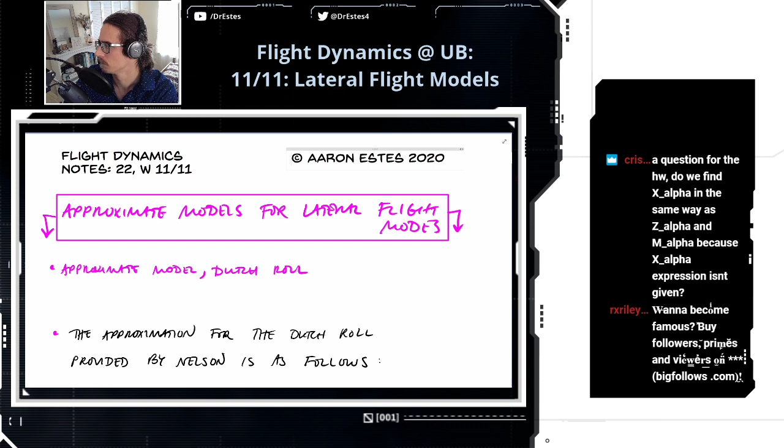Let me pull this up really quick. Hold on, let me ban this. Good. Okay, so the question was, how do we find X alpha in the same way as Z alpha and M alpha? Because the X alpha expression isn't given.

Hold on a second. What about X alpha right here? Did you see this? Do you mean the X alpha expression is given?

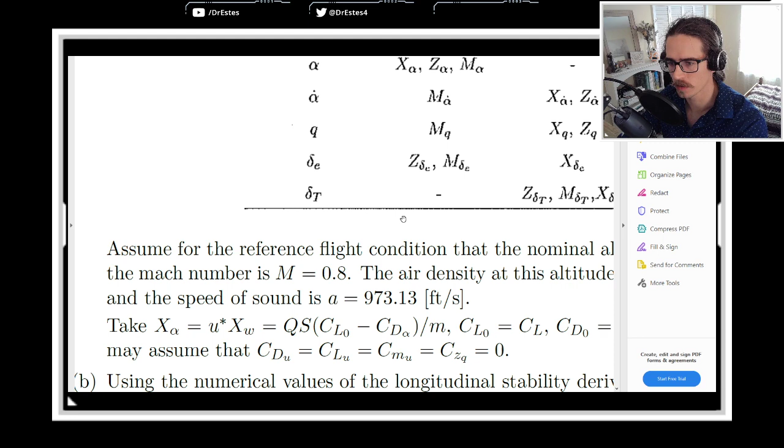Oh wait, I missed that part. Sorry, okay, that's fine. Wait, are you saying that X alpha isn't in there, because up here I mentioned that expressions for these stability derivatives that you need can be found in table 4.2 in Nelson.

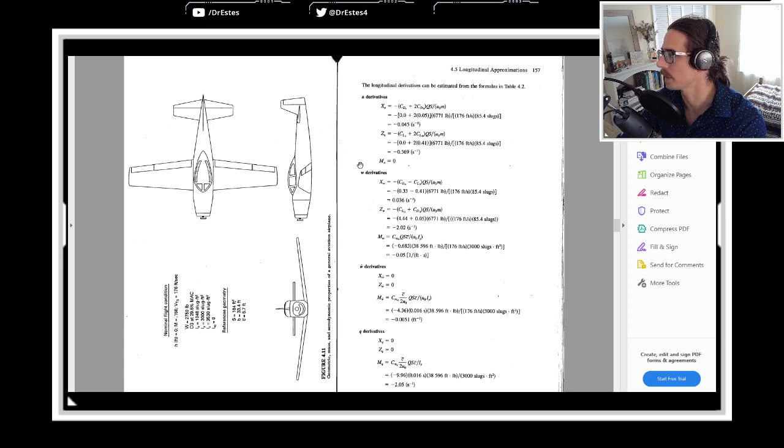So like, actually I have Nelson open. Oh, it's not in the textbook table. I see, okay, I see what you're saying. So X alpha, it's missing. So where the heck do I get it?

Yeah, you just use this. Do you guys have other homework questions while we're on it?

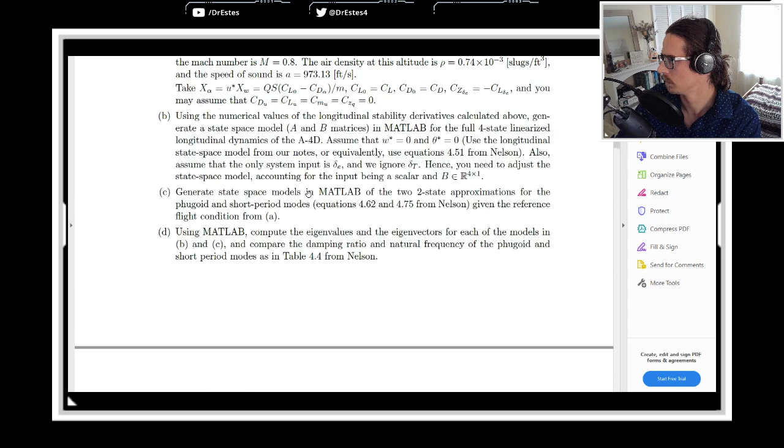Yeah, this one's comparing the full longitudinal flight dynamics model to some approximate models.

So today we're going to do approximate models for lateral flight dynamics.

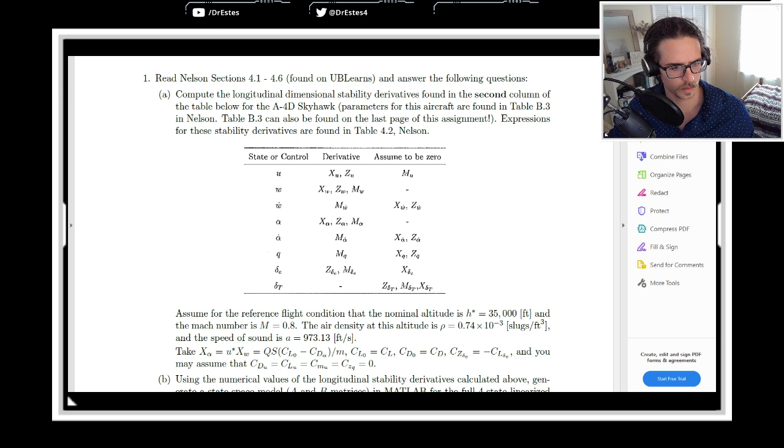But anyways, fundamentally, any aircraft motion, you could say that that motion is a superposition of its modes.

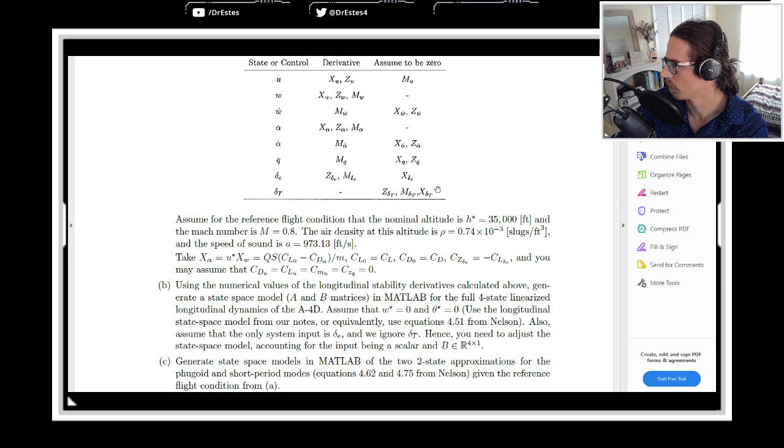Another question: for question 2, is the aerodynamic moment delta M because it has a pitch perturbation, or is it all of them combined? Sam Barry asks the same thing.

What you should do here is go to these equations in the textbook, 3.48 and 3.49. We have perturbations in aerodynamic forces and moments. Let me pull up chapter 3. Here are these equations, the aerodynamic moments L, M, N.

What is this question asking? I think it just means solve for the whole vector. It says UB-MAE student... right, I mean if, like...

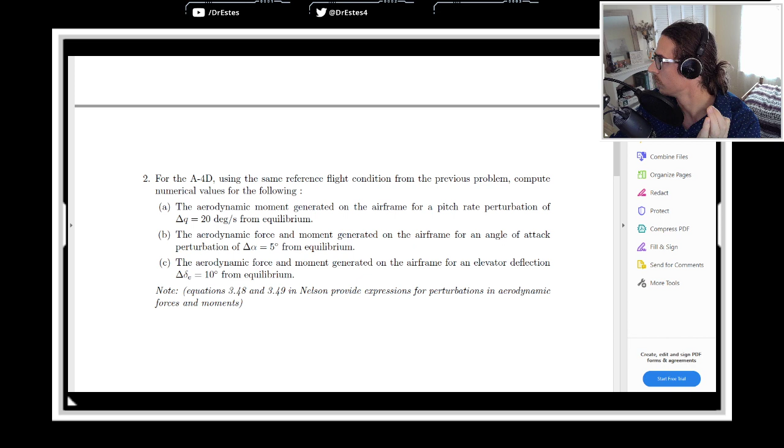So delta Q, where am I going... that doesn't show up in delta L. It shows up in delta M, but it doesn't show up anywhere else, right? So the only aerodynamic moment affected by a pitch rate perturbation, that's what Q is. Only delta M is affected.

So if more than one of these moments or forces happens to be affected, include that as well. And UB-MAE student makes a good point: the most thorough answer is to provide the whole vector, where some of the elements might be zero if that particular perturbation doesn't affect one or the other.

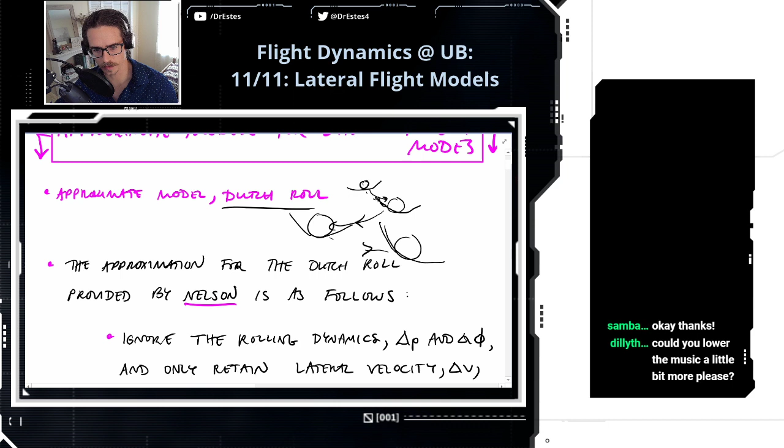Oh yeah, let me lower that music, Dilly. Let me know if it's distracting at all. Okay, you're very welcome.

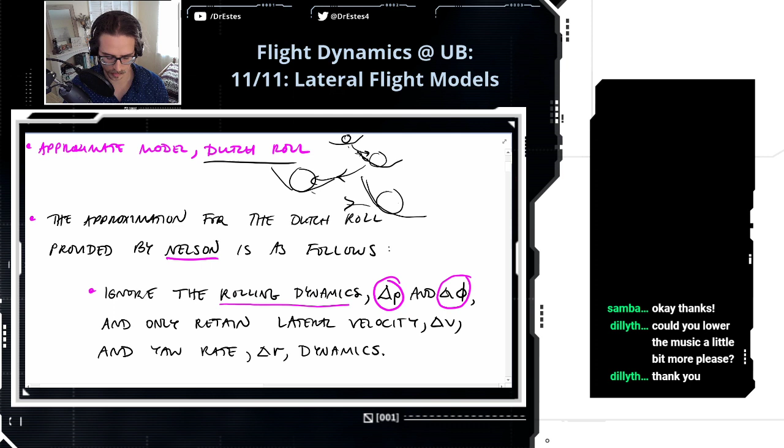So this is how Nelson does this simplification. First, he's like, okay, I know that this rolls a little bit as it goes back and forth, but we're going to ignore the roll. So we're going to ignore delta P, which is the angular velocity that pertains mostly to roll, and we're going to ignore changes in the bank angle itself. So we're only going to keep the lateral velocity and the yaw rate dynamics in our original model.

So here's our original model, and we're going to employ this assumption right here. So we're going to throw out this roll rate equation, we're going to throw out this equation as well. Let's see.

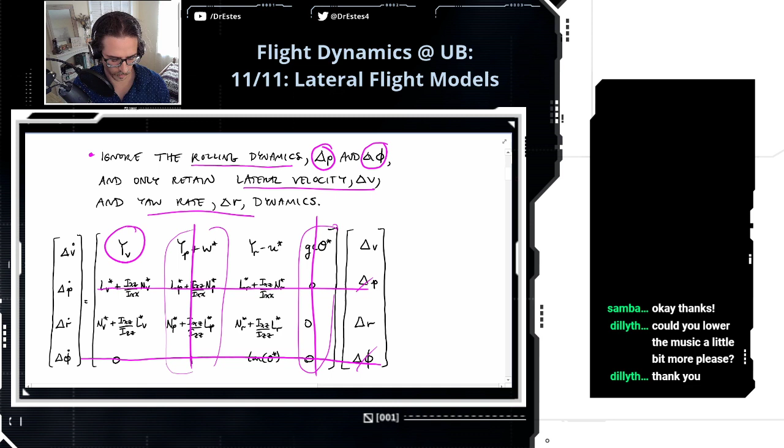Because these second and fourth columns are going to be multiplying these variables, in this case we're actually going to eliminate these as well. So it only leaves these entries of our original model. So we're ignoring the rolling dynamics, we're just keeping the lateral velocity and the yaw rate.

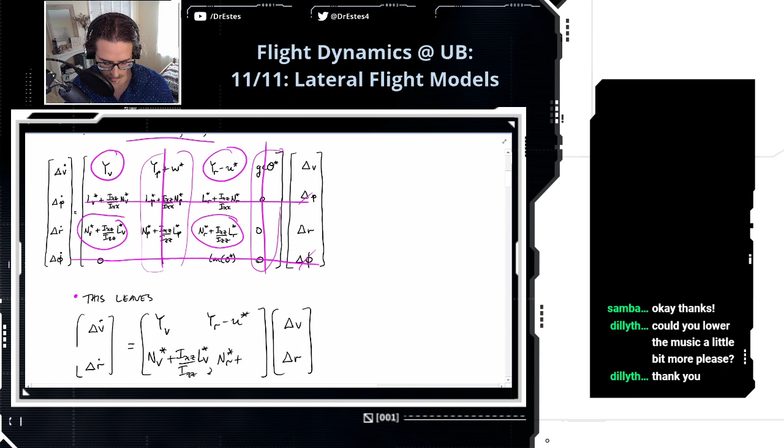So this is going to leave, let's just take those four remaining elements and throw them in the second order. So we're going to have y sub v, y sub r minus u star, nv star plus ixz over izz lv star. I'm running out of room here, but okay, nr star plus ixz over izz lr star.

And if you're, I doubt any of you remember what these star variables are, like these nv, nr. I don't remember myself, so I just wrote them down here. Basically this nv star, it's these inertia terms multiplying nv. And just to quickly remind you what each of these means, nv is the derivative of n with respect to the lateral velocity, so n is the yaw moment. So this is the derivative of the yaw moment with respect to lateral velocity. And I believe it's times 1 over the...

Oh shoot, I'm not going to remember which inertia term it is. I think it's like IYY, maybe. Okay, but don't quote me on this one. It's like 1 over some inertia term times this partial derivative. Whenever you're looking at any of these stability derivatives, they have some either a mass or an inertia term, so I just wanted to remind you that those things are there. I'll put a question mark there, it's some inertia term.

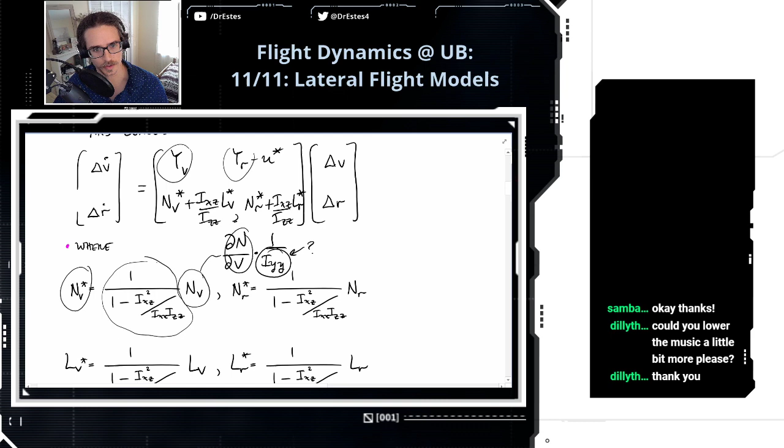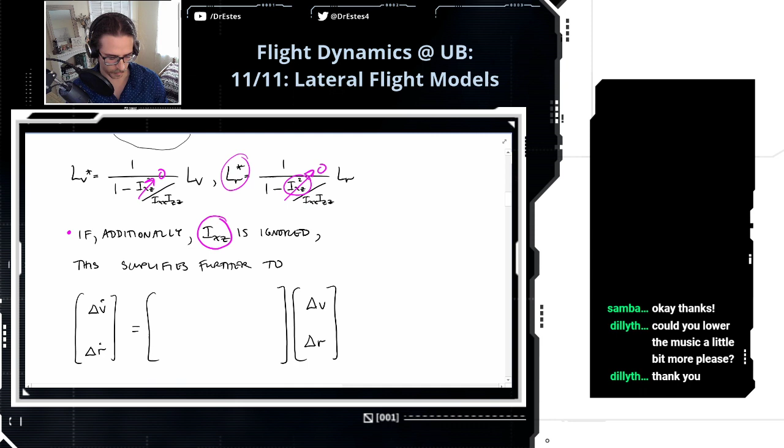So we cut out two degrees of freedom, basically, we made this a second order model. Now, additionally, if we ignore this inertia term, it's going to simplify this a little bit more, because all of these star variables, they're pretty much associated with this IXZ term. So if I ignore IXZ and it goes to zero in all of these, instead of having this NV star in my system, this is going to reduce to just having NV, or whatever it is in either case. So let's make this assumption, and it's going to make our equation a little simpler yet again. Remember, each time you're cutting something out, you're losing some of the fidelity of your model. It's just a question of does it still capture the basics of the real system?

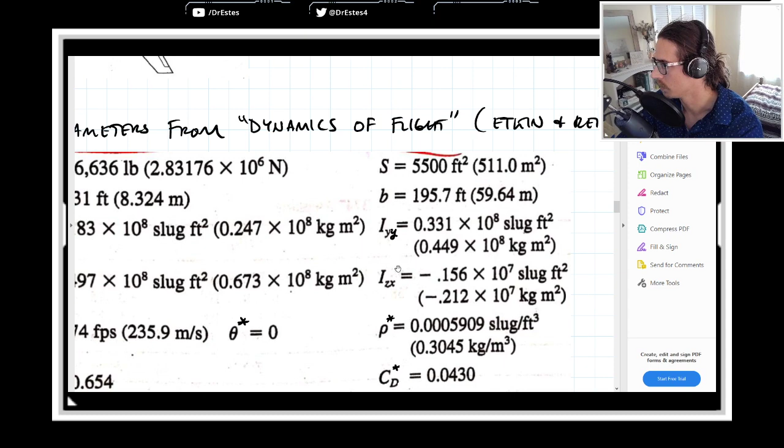Let me pull up something really quick. So if we're talking about cutting out IZX, that inertia, let's zoom in here. You can see that this is minus 0.156 times 10 to the 7th slug times feet squared. So this is definitely, it's a huge number, it's not negligible. However, if you compare it to these other inertia terms like IYY, it's times 10 to the 8th, same with IXX and IZZ. So it's an order of magnitude smaller. That's why he's kind of like, can I ignore it? And that's what they do.

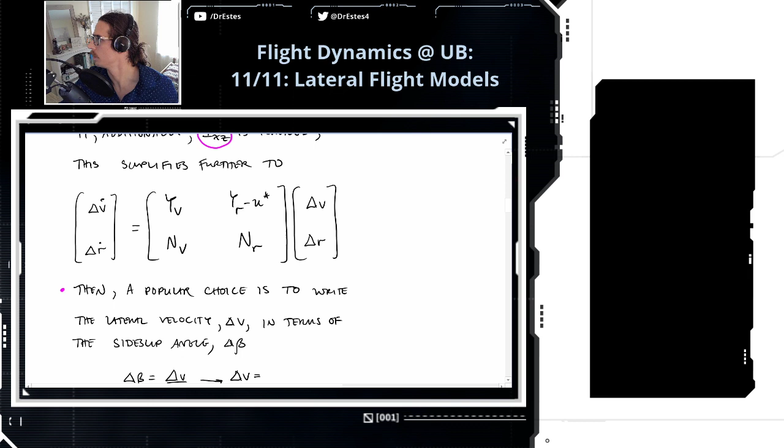Okay, so we've simplified this a little bit. Now, a popular choice, instead of writing this equation in terms of the lateral velocity, which is delta V, we can write this in terms of the side slip angle. All of these variables are perturbation variables with the delta out in front, meaning they're small. So for small side slip and small lateral velocities, we have this relationship. So I could say delta V is just U star, which is my longitudinal speed, times a perturbation in my side slip angle.

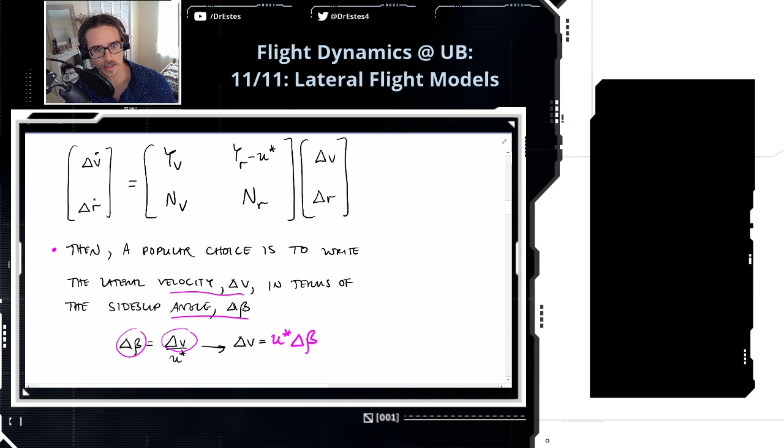So if we take our first equation up here, this delta V equation, now I want to write it in terms of delta beta. So if you multiply out this first row, you're going to get delta V dot is YV times delta V, yada yada yada, you just multiply out that matrix. So if we take this and we use this beta assumption, this is going to become U star delta beta dot, that's just the time derivative, is going to be YV times U star delta beta. So I'm just substituting in this expression.

Delta R. Now, what they also like to do is, now that we're writing things in terms of beta, this stability derivative YV, the derivative of the lateral force with respect to side velocity, we can write that in terms of beta as well. So this is the definition of that stability derivative, 1 over m times this partial. But if we write V in terms of side slip, assuming they're small, then we can do this. So I have 1 over U star times 1 over m dy d beta. And this is y beta. So I could say YV, that stability derivative, is the same as 1 over U star times Y beta.

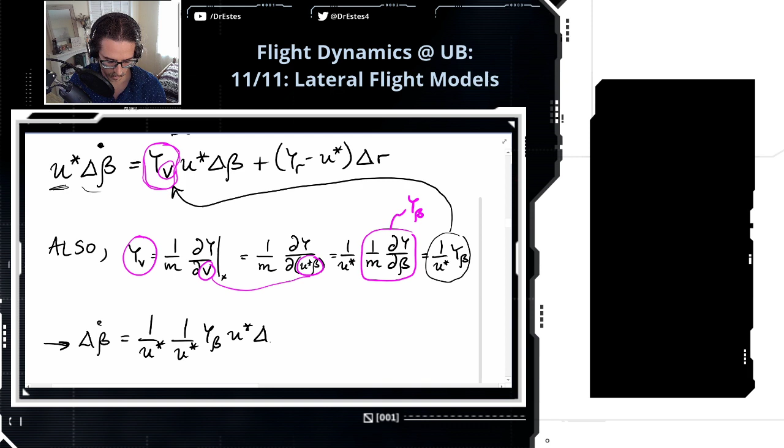So let's take this delta beta equation. We'll divide both sides by U star. I'm going to have 1 over U star times YV, which is 1 over U star Y beta times U star delta beta. Let's cancel those two. And then I'll have plus, so I have to divide this stuff by U. Let's do YR over U star minus 1 delta R.

Okay, so this will be our final simplified delta beta equation. We'll put it in a matrix in a second. But that's our first equation, and we had two equations here. We also have this one, this delta R dot equation.

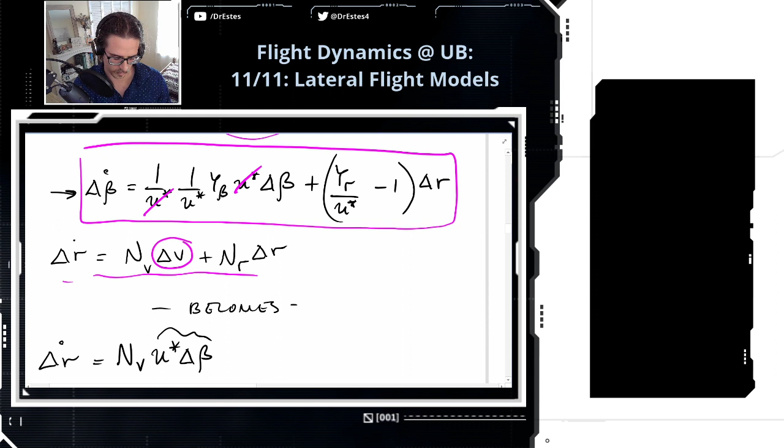We want to write this in terms of beta as well. So this delta V term, we're going to change that. So N V, U star delta beta, so that's delta V, plus in R delta R.

And we want to do the same thing that we did with YV, that we did with NV. We want this to be a partial with respect to beta now. You can go through the same line of reasoning, but it's going to get you to this place. Basically, N beta is, you just need that factor of U star. So then delta R dot is going to be, so these U stars are going to cancel here. So I'm going to have N beta delta beta plus N R delta R.

Okay, and we're finally at the end of this simplification of the Dutch roll. We went from a fourth order to a second order, and we're just going to put these two equations that we just got into this matrix form. So the delta beta equation: 1 over U star Y beta, and then 1 over U star YR minus 1, and then N beta, and then N R. So they have this in the Nelson textbook, and now we have the details of where the heck they got this.

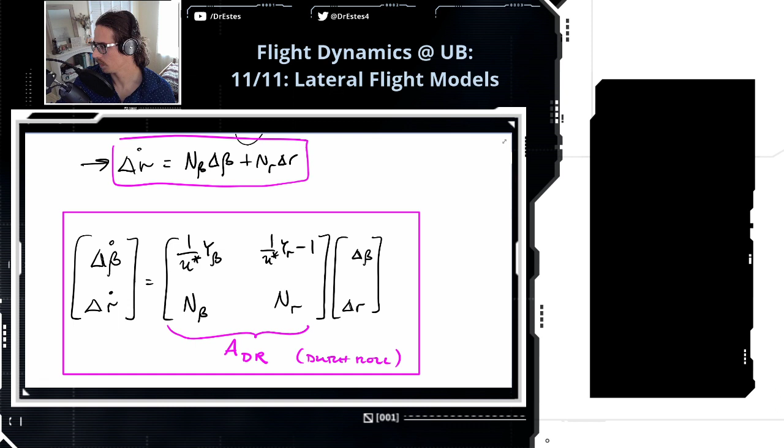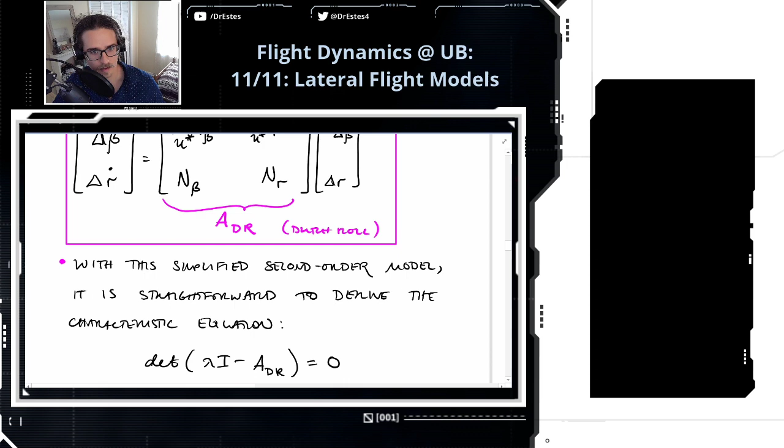Okay, so now that you have this simplified second order model, it's straightforward to get the characteristic equation. From the characteristic equation comes the roots, and the roots dictate your stability, your settling time, all of this stuff that you're going to want to control. So having this simplified model gives you the advantage of having an analytical expression for all of this stuff.

And you can do the root locus analysis. We spent a day doing root locus with the longitudinal simplified equations. So you could do the same kind of root locus kind of stuff with this.

So if you have a matrix equation, like a state space model, this is the characteristic equation: determinant of lambda times the identity matrix minus this A matrix that we derived. So if you do that math, we're taking the determinant of this matrix.

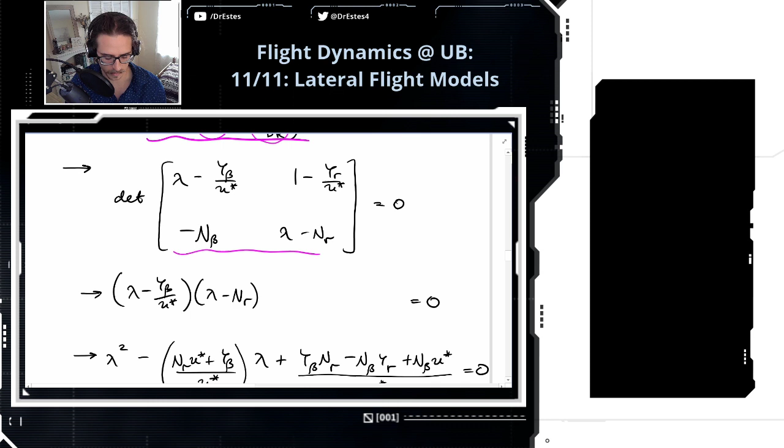Just to remind you of a determinant of a 2 by 2, you're going to have top left multiplied with bottom right minus... well, it'll be that. And then I just multiplied this stuff out. All stuff that you guys have done before.

You are experts. Like with this second order form, you know that this term is the natural frequency squared. You know that this coefficient of lambda is 2 times the damping ratio times the natural frequency. So you can get analytical expressions for the damping ratio, the natural frequency, the settling time, etc.

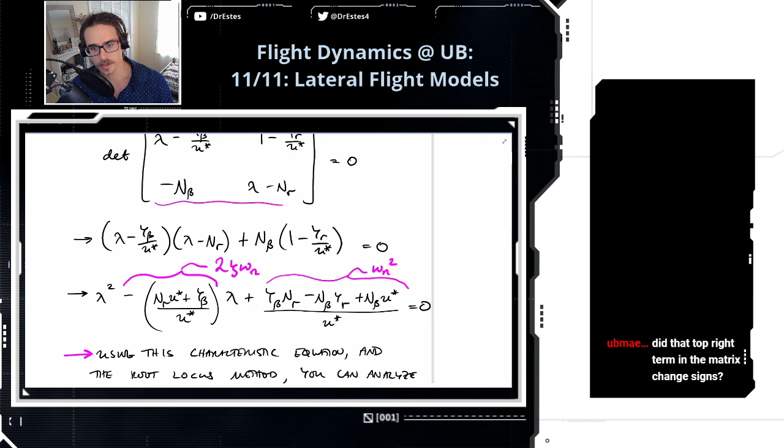Did that top right term in the matrix change signs? Yes, okay, yes, because we're subtracting it here. Good question. So everything should be, yeah, because this changed signs. This did. Yeah, good question, just because we subtracted that bad boy.

Okay, so basically what I'm saying is, okay, it's great. I get this analytical expression for the characteristic equation. I can say that I can analyze how a specific term affects the dynamics using root locus. Da da da da da.

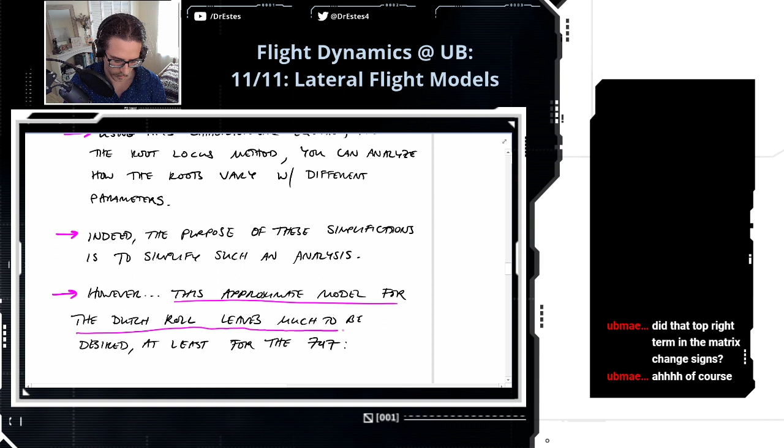Okay, but here's my beef. Here's my beef with this model. This approximate model for the Dutch roll leaves much to be desired. Well, at least if you're looking at the 747. And this is what I mean. Let's consider this flight condition.

This is what we've been looking at, flying straight at 774 feet per second. I forget what altitude we were looking at, but whenever we've been playing around with the 747, I've been using the same flight condition, so we can just go back to a prior set of notes to get more of the details.

But what I want to do, we have numbers for each of the elements in this matrix. So here's our simplified model, but I just plugged in the numbers for the 747. And if we grab the eigenvalues, there's two of them, and they're complex, which is good because this is an approximate model for the Dutch roll. The Dutch roll has complex conjugate roots, so at least we have that.

What I want to do is get the natural frequency, damping ratio, settling time, and compare that to the actual Dutch roll from the full model that wasn't simplified. And let me give you a couple cheat codes, as you guys mentioned before, some dynamic systems cheat codes.

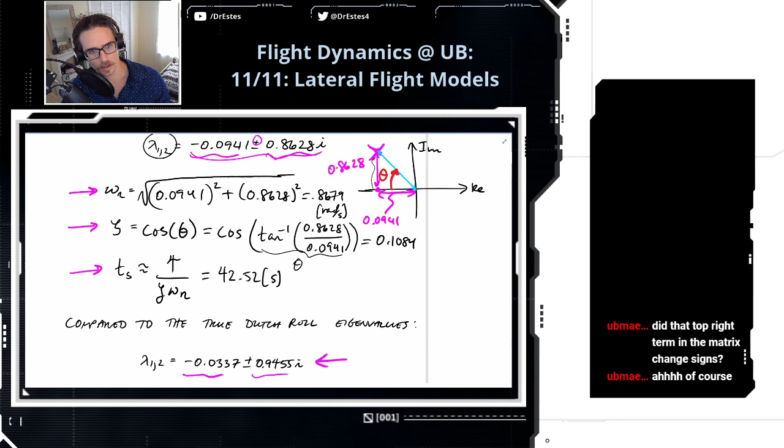Okay, that's what the approximate model says. If we go back to our full fourth order model, before we did any simplifications, I already got the eigenvalues associated with the Dutch roll, and they are these. They're complex. You can see already the real part is different. The imaginary part, not super different, you're looking at 0.86 versus 0.95. But the real part is significantly different.

Okay, let's just blast through this. If I use the same technique, this is what I got for the natural frequency, 0.946 radians per second. If we compare that, 0.8679 to 0.946, I think that's pretty reasonable.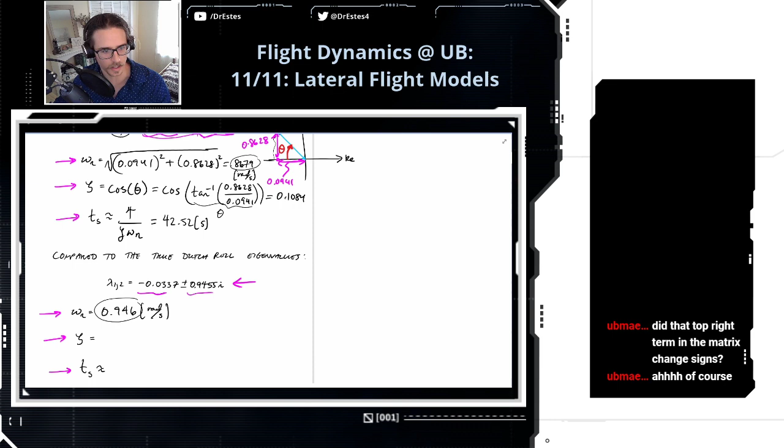What is that in hertz, cycles per second? So 0.8679... wait, how did I do that? This conversion always, I have to think carefully about it. I think I just divided by 2 pi, right? That gives 0.1 cycles per second. And then the real one is 0.15 cycles per second. Okay, that's pretty close, that's actually reasonable.

Damping ratio, what about that? I think this one's off.

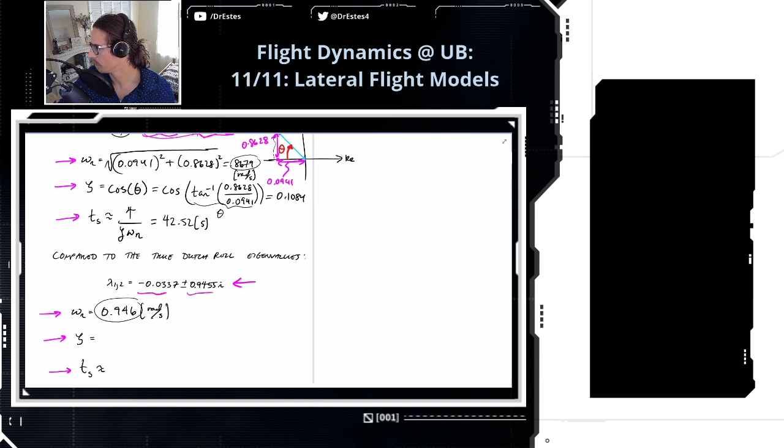0.0356 compared to 0.1084. So with the approximate model, we way over-predicted the damping ratio. You'll see this in the settling time, because this has a smaller damping ratio, in real life it takes much longer to settle. 118.76 seconds, so 2 minutes, and this one takes 3/4 of a minute. So the settling time is significantly off.

So if you design a control system for the Boeing with the intention of maybe damping out this Dutch roll if it ever gets excited, you're going to be basing that control system on a model that isn't a super accurate representation of the Boeing 747. But something you should know is that any models we have for real life systems always have errors, because they are abstractions of the real thing.

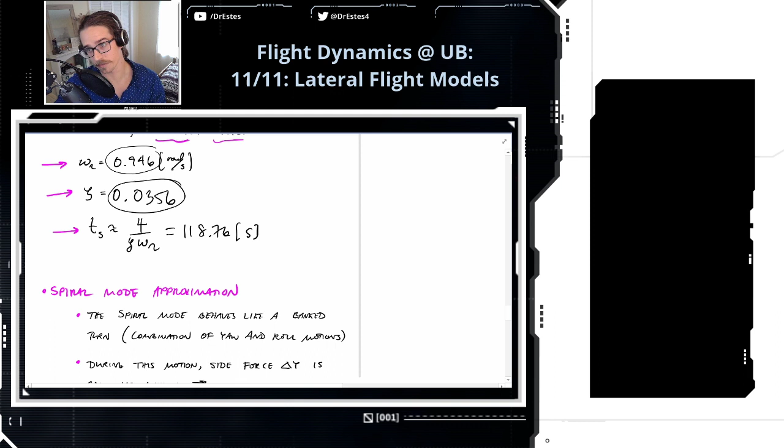Okay, let's move on because we have two other models to make. The Dutch roll was the most difficult. Spiral mode is a little bit more straightforward, and the roll mode, you're just going to laugh to yourself at the simplifications that we make. Okay, the spiral mode - what the heck is it?

If you just want to visualize the spiral mode in your head, it kind of behaves like a banked turn. So a combination of yaw and roll motion, but usually it's kind of like a fixed roll angle or maybe a very slowly changing roll angle. So it's like we have this maybe circular path that the aircraft is navigating, and it has its wings kind of tilted into the turn as it's going around.

Now, this is like the style of turn that a commercial aircraft is going to do. And the reason they bank during the turn is so that the side force is reduced, so that your drink doesn't spill into the aisle or onto your Nintendo Switch.

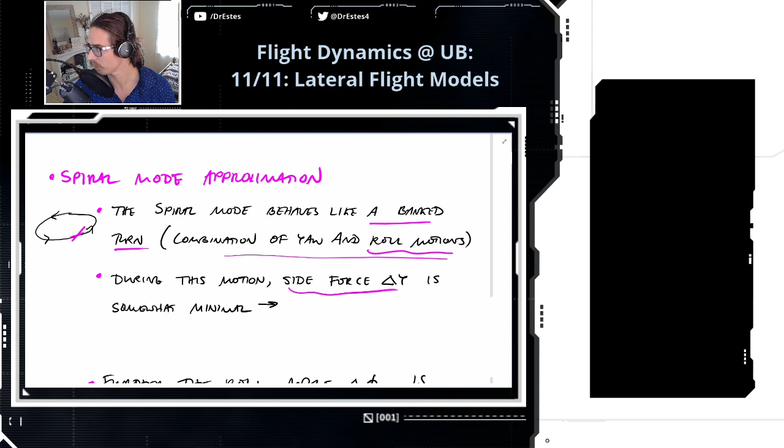So the first approximation that Nelson makes, considering that the side force is somewhat minimal because of the banked turn - the side force affects the lateral velocity equation - so the approximate model neglects the delta V dot equation. I'm going to have the 4x4 matrix below here, and we're going to cross out different stuff.

Okay, so further, the roll angle is assumed constant during this banked turn. Like I said, the real spiral mode, the roll angle slowly changes over time. If you have a stable spiral mode, your wings will level out and the roll angle will go to 0. If you have an unstable spiral mode, the roll angle increases.

You kind of go in this tornado motion towards the ground, and it's trouble, unless you correct for the motion. Okay, so we're assuming the roll angle is constant. Now, if the pitch angle is nominally also 0, meaning the nose of the aircraft is level with a flat earth, this implies that any change in my roll rate is 0. So delta P is your roll rate. Well, this also implies that the derivative of my roll rate is 0 - so like my roll acceleration.

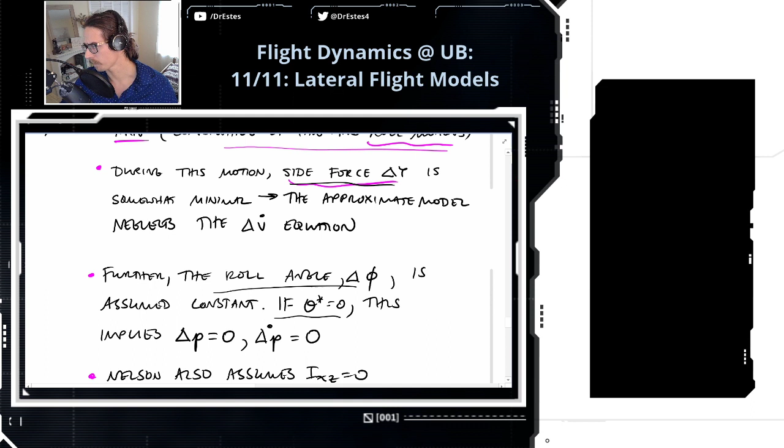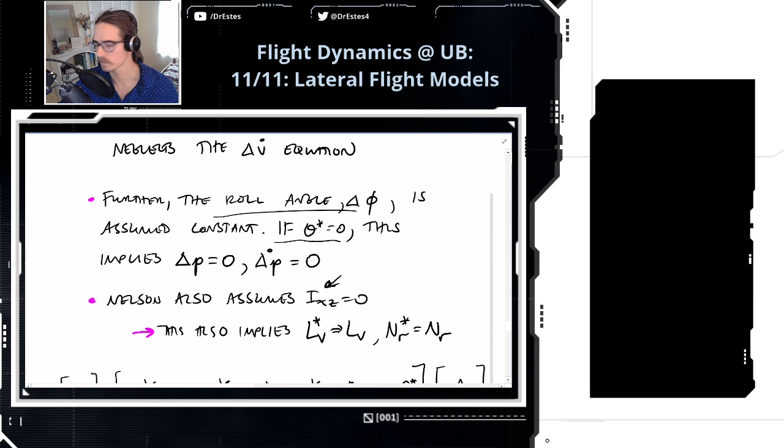Okay, here we go. We're going to take this fourth order model that we started with, and we're going to start eliminating things. So number one, this side force equation - we're just going to ignore it, we're going to throw it out. We're going to assume that the nominal pitch angle theta star is 0, so the tangent of that's going to be 0.

And that means that delta phi dot is equal to 1 times delta p. So this is saying that delta phi dot is equal to delta p. And we assumed that this is constant, so this is 0. If the roll angle isn't changing, then that's 0. But from here, this is equal to delta p, so delta p is 0.

What other assumptions do we have up here? Oh yeah, if this is 0 for all time, then delta p dot is 0. And these terms in this second column, these are the terms that when you do matrix multiplication, they're going to multiply with this 0. So this whole column is going to be multiplying with 0.

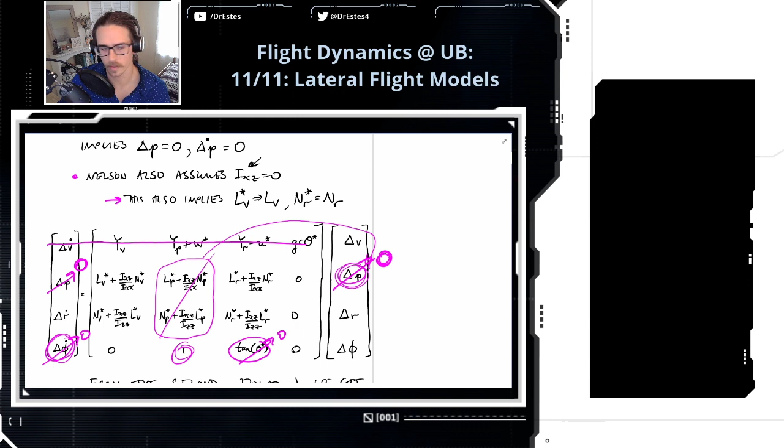All right, so let's keep working with this. From the second equation, this delta p dot equation, that's going to be equal to 0. And that's going to be equal to, oh right, we said IXZ is 0. So this is 0, this is 0, this is 0, this is 0, so those terms go away. And then all of these star terms just become the unstarred version. So this LR star, that's just LR, and that's just because we're assuming IXZ is 0.

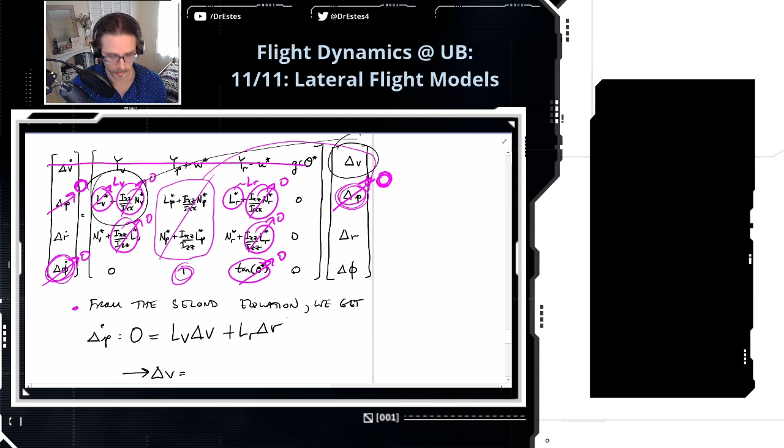So now if I look at that second equation, I'm going to have LV, and this multiplies with this delta V. LV delta V plus LR, which is going to multiply with delta R. So that equals 0. So you could solve for delta V from this, and it's going to be minus LR over LV delta R.

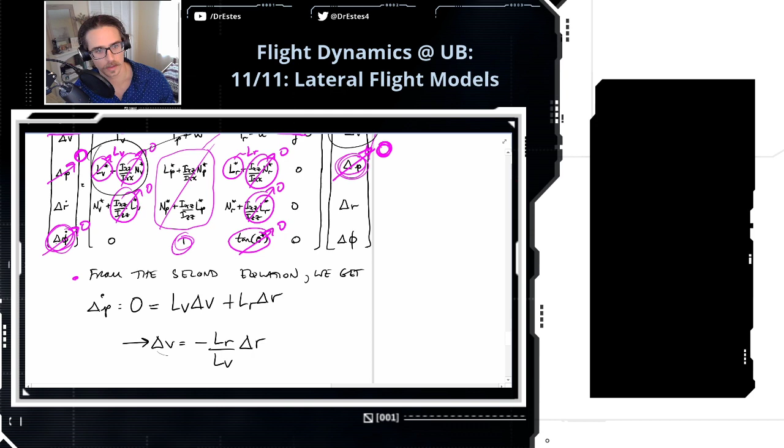Okay, next I want to look at the third equation, this third row right here. So delta R dot, that's going to be NV delta V plus NR delta R. And what I'm going to do is take this expression that we got and throw it in right there. So this is going to be minus NV LR over LV delta R plus NR delta R, that's just substituting it in. And then we can just write this in a little bit nicer way: NR LV minus NV LR over LV, all of this times delta R.

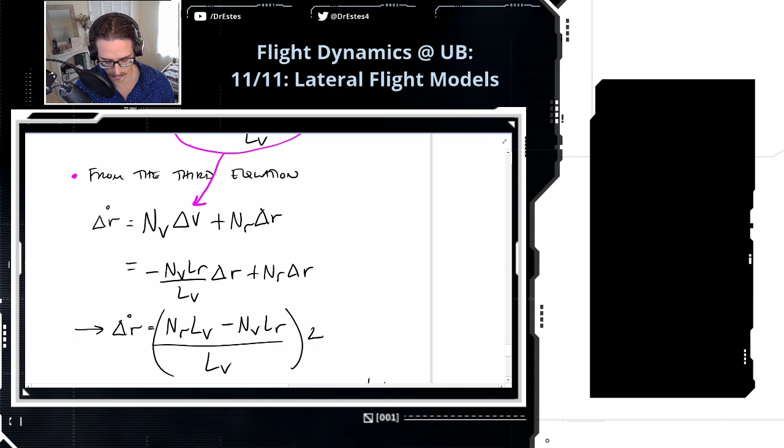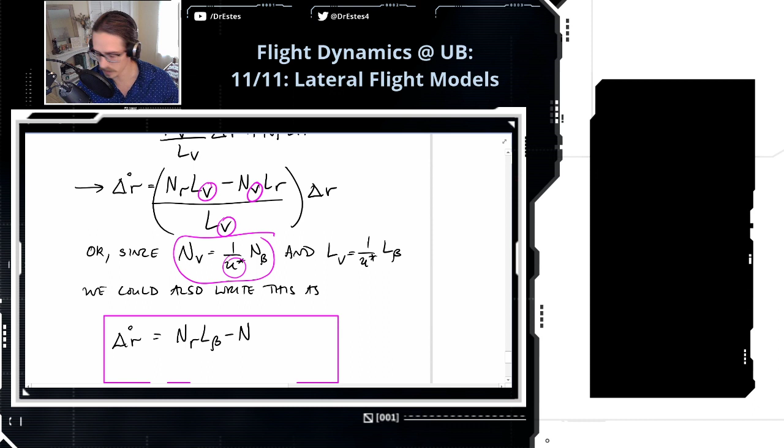Oh right, and then Nelson likes to, instead of using these V stability derivatives, replace them with beta stability derivatives, just like we did with the Dutch roll. So we have these relationships: NV would be 1 over your speed times N beta, blah blah blah blah blah. So if we substitute, it turns out that we have NR L beta minus N beta LR over L beta times delta R.

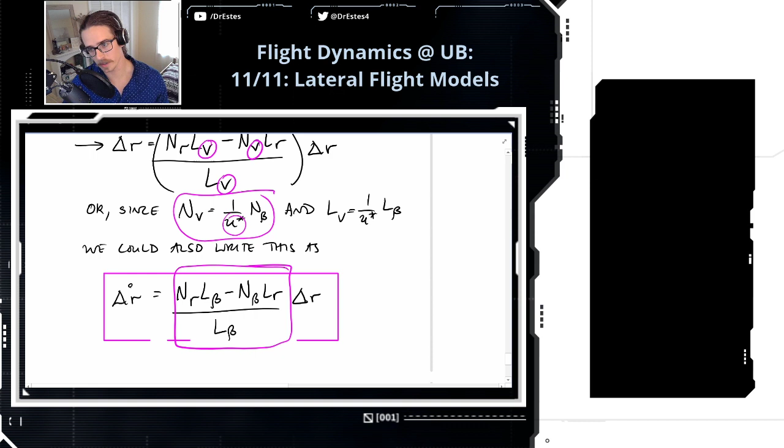Now this is just a first order model. The Dutch roll model was second order, so we had 2 roots, and they were complex conjugate roots. Well now we just have 1 root. Whenever you have 1 root by itself, it's going to be a real root — you can only have complex roots if there's a pair of them. So this can be either a positive real number or a negative real number. Hopefully it's negative, meaning it's stable. So this right here, this is going to be the eigenvalue for this model, or the root of the characteristic equation. And we'll call it lambda spiral. Just keep in mind, this is approximate.

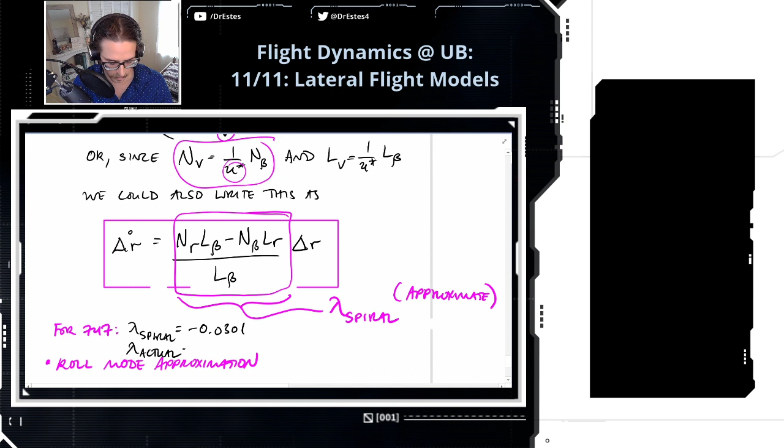Okay, for the 747, lambda spiral approximate is minus 0.0301. Lambda actual, the one we got from the 4th order model, is minus 0.0073.

Actually, you could talk about the speed of all of these roots. And when I'm talking about the speed of the root, I'm talking about the time constant or the settling time. The settling time or the time constant of a root is based on... wait, let's go back over here.

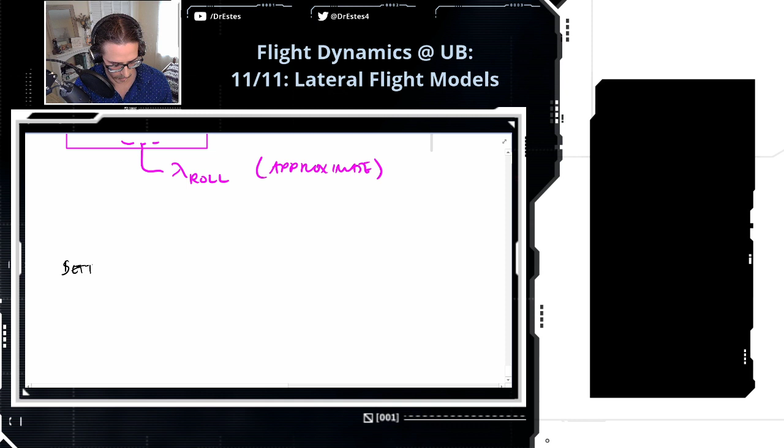Let's go down here. Okay. The settling time: the time it takes for the system to decay 98% towards a resting state.

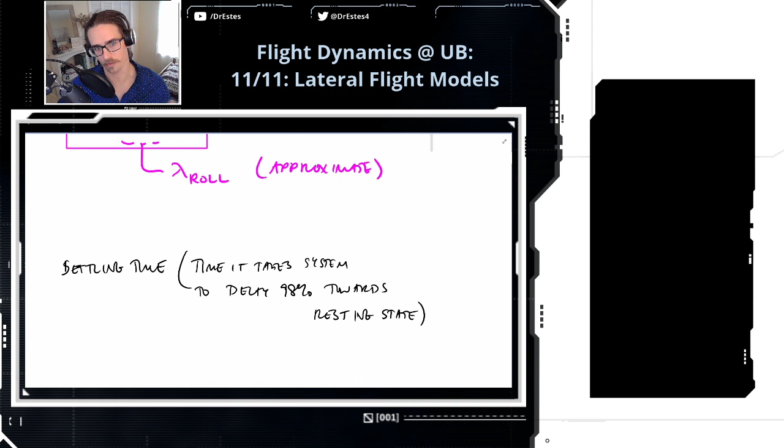So wherever you position a linear system, if it's stable, if you just let it go and do its thing, it'll decay towards a resting state, which is 0 for linear systems. So the settling time is the time it takes for it to get 98% towards that final resting state. For our purposes, it's basically like it has settled within that time.

Okay, so the settling time, this is the most general formula for it. I should put approximately, I think it's approximate: minus 4 over the real part of your root.

So let's take the 747 for example. It has 4 roots, and each has their own real part. The real part of lambda 1, which is the Dutch roll, the first one, is minus 0.0337. And that is equal to the real part of lambda 2, because they're complex conjugate, they're the same, so that's the Dutch roll. The real part of lambda 3,

which is going to be the roll mode, is this, which we haven't gotten to yet. We're looking at the real part of lambda 4, which is the spiral mode. And I said this is the slowest. Okay, so why do I say it's the slowest?

Let's get the settling time for each of these. So for the Dutch roll, it's minus 4... Is it just the real part because the Euler identity keeps the real part in the exponent, but the imaginary part goes to the sine and cosine? You are exactly correct. The real part dictates the speed of the exponential decay, and the larger the magnitude of the real part, the faster the decay is. And then a byproduct of the exponential decay is the settling time.

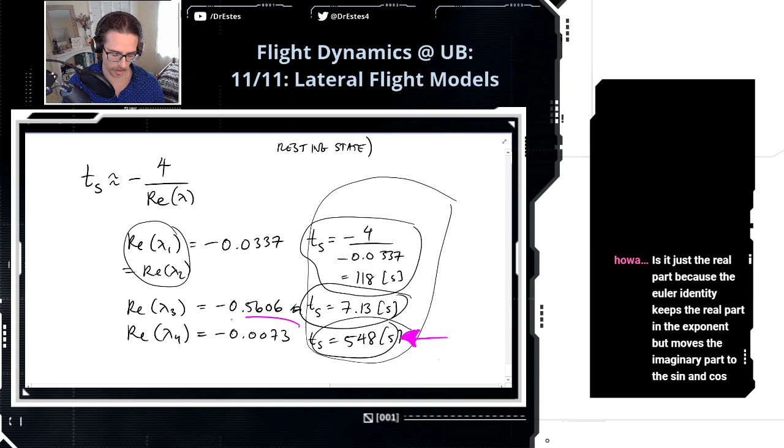Unless you stabilize it with a controller or the pilot themselves kind of corrects for it. But I hope that gives you a good idea of how you can determine which is the slowest root. It's going to be the root with the lowest, the smallest real part, smallest in magnitude, that is.

Wait, okay, so let's get the settling time from down here. This helps us. So the actual settling time is like 540 seconds of settling.

So out of the 4 roots, 2 will have the same real part, which is the Dutch roll, and you can tell the other 2 apart by the settling time. You're exactly right. If you're given 4 roots and they tell you, okay, this comes from a lateral flight dynamics model, you would be able to say, okay, right here I'm looking at the Dutch roll, those are the complex roots.

And then from the other 2, you're like, okay, which one's slower? Okay, the slowest, that's the spiral one. You're an expert. People will be like, how did you know that? And then you won't tell them, you'll keep it a secret, because you should never reveal your tricks as a magician.

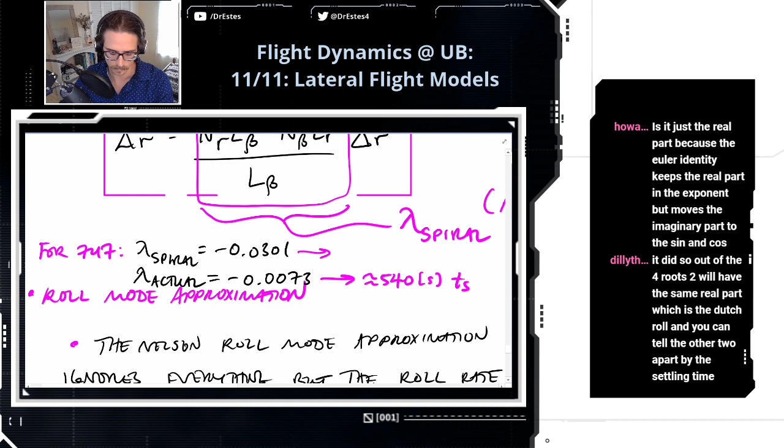Okay, so obviously now you know that this is going to predict a much faster settling time because between these 2 roots, I know that this is the slowest one. So, okay, let's calculate it: 4 divided by 0.0301, this predicts like 132 seconds.

So, at least for the 747, that's significantly off, right? That's a huge error. Maybe for a different aircraft, it wouldn't be so bad. But this is what Nelson prescribes.

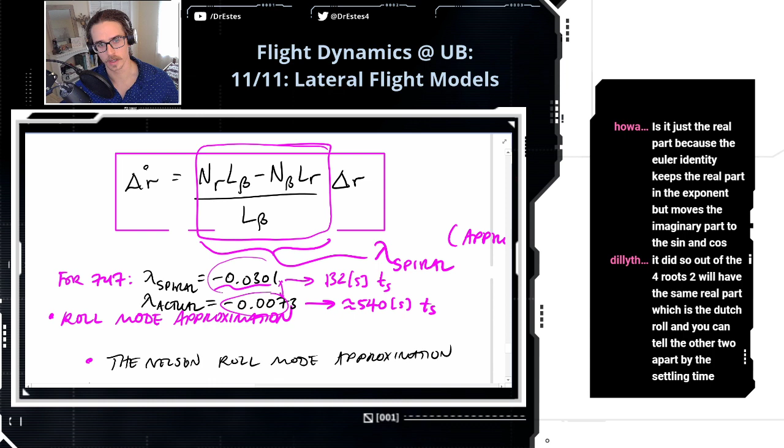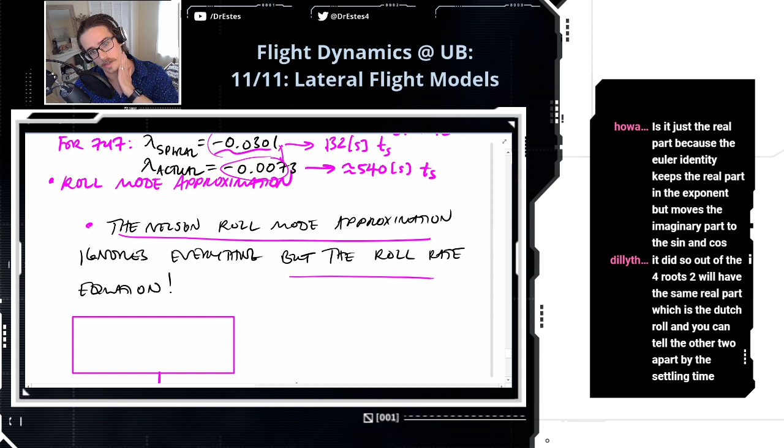Okay, we have one more mode to get an approximation for, and that's the roll mode. The Nelson roll mode approximation ignores everything but the roll rate equation, delta P. And within the roll rate equation, they only retain the terms delta P. So it becomes a very simple equation.

Delta P dot, the time derivative of my roll rate, is LP times delta P.

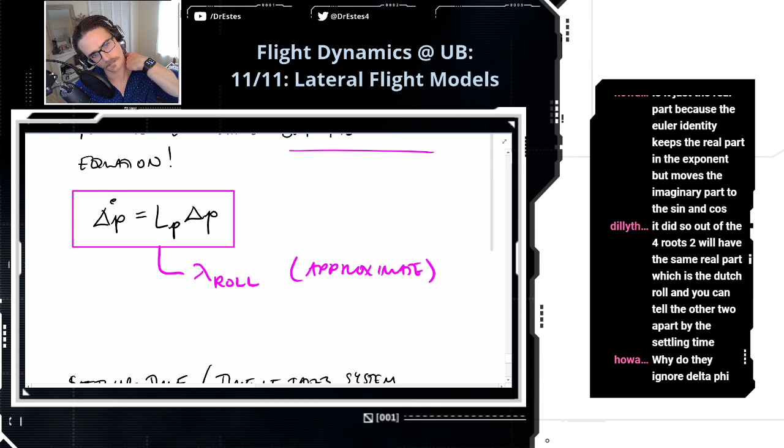Why did they ignore delta phi? That's a good question. Let's go up here. I know this one's kind of cluttered, but that's a really good question.

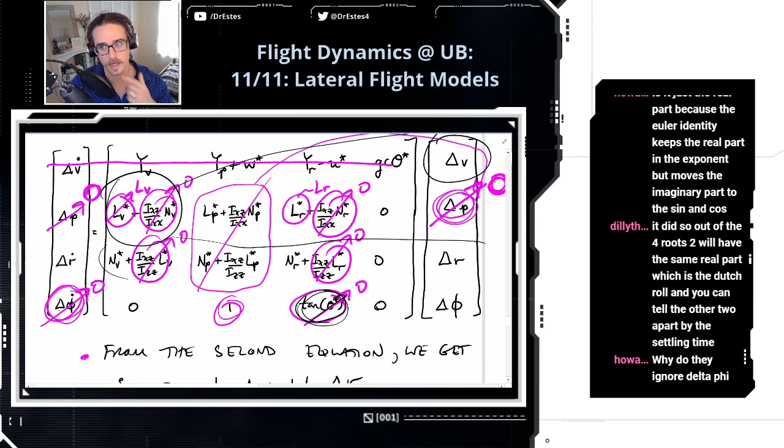Let's look at this delta phi equation. I'm assuming we're going to assume that this nominal pitch angle is 0. So the delta phi equation is going to be this: delta phi dot is going to be equal to delta P.

If we kept that, we would have this second order system, right? And what would it look like? It would be LP, 0, 1, 0.

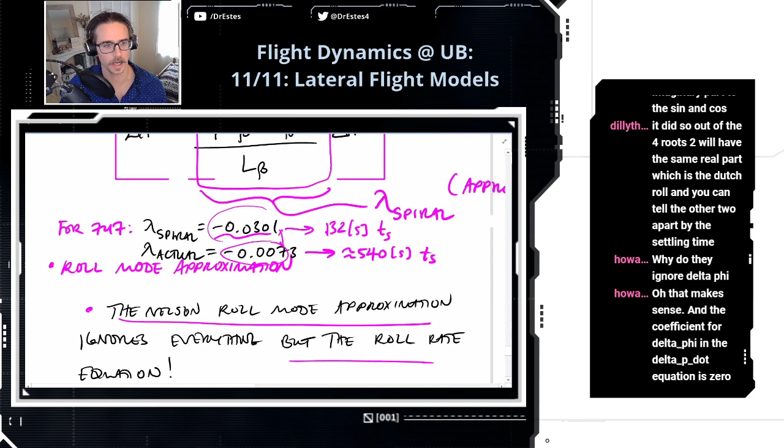If you do that, that gives you a 0 eigenvalue, right? Oh, that makes sense. And the coefficient for delta phi in the delta P dot equation is 0. Yeah, right. They're also ignoring, well, delta P multiplies that delta phi term with the 0 anyways.

Oh, you know what? I think I have a good idea for that. Because let's talk about what the roll mode is physically doing. They're looking at it as a pure rolling motion. So if I have an aircraft and it's just looking right at me...

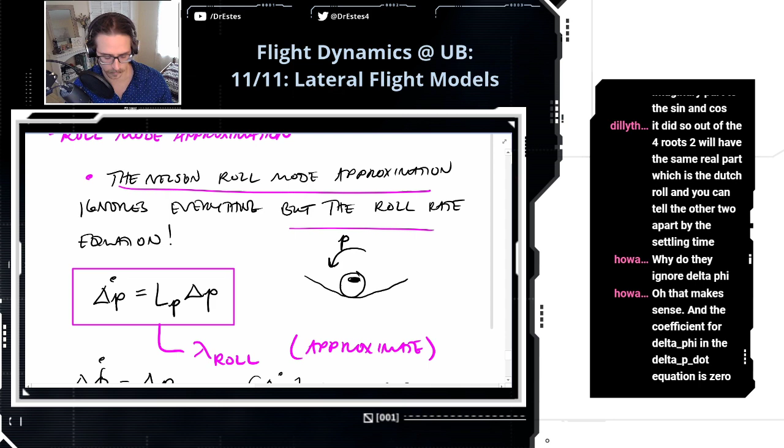and then I roll with some rate p, over time, let's say that the rate... well, hold on a second. First of all, this is a first order system, and if it's stable, let's plot the roll rate over time. Maybe I start with some non-zero roll rate. Because this is stable, it's going to slowly stop rolling over time.

And we found that the settling time was like 7 seconds or so. So it'll roll for like 7 seconds, and it'll get successively slower, and then it'll stop rolling. So, but if I imagine how that's happening, I have some initial roll rate, and then this moves around, and maybe after 7 seconds, who knows, maybe it's upside down. Maybe it looks like this now.

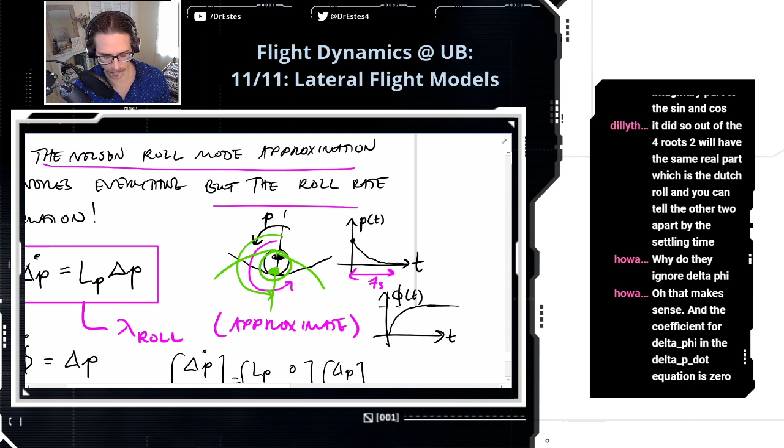And we're flying upside down, and it stabilized me with this like 180 degree bank angle. So that means if I plot our bank angle over time, it's increasing, and then it goes to some non-zero value. Now, whenever you combine a system like this in dynamics, where one of the states doesn't go back to zero, but it stabilizes at some non-zero point, you'll get a zero eigenvalue.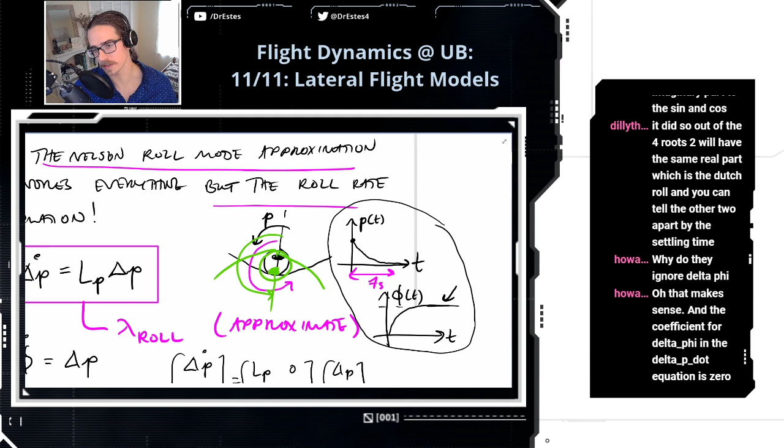So whenever you see a zero eigenvalue, that's what it means. It means something didn't come back to the origin. And we can prove it with this. So let's take this A matrix.

And we're going to name it after you, because this is your approximation. How mia, senor? And this is your fault. 0, 1, 0.

Let's get these eigenvalues. Okay, so you got the 0, and then you have the minus 0.4336. So if you take the Nelson approximation, though, which is just LP, then you just get this.

So I think the reason they throw out that theta, or wait, sorry, I'm saying theta, if you wanted to recover that roll angle after the fact, you can do it. You can integrate the roll rate and find out what that angle would have been. But I don't think having that 0 eigenvalue is going to add too much value to the model.

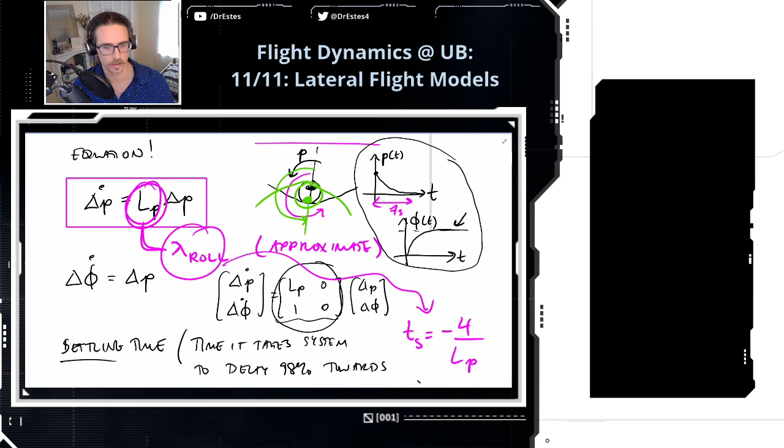So that was 9.23 seconds compared to 7.14 seconds. Not bad.

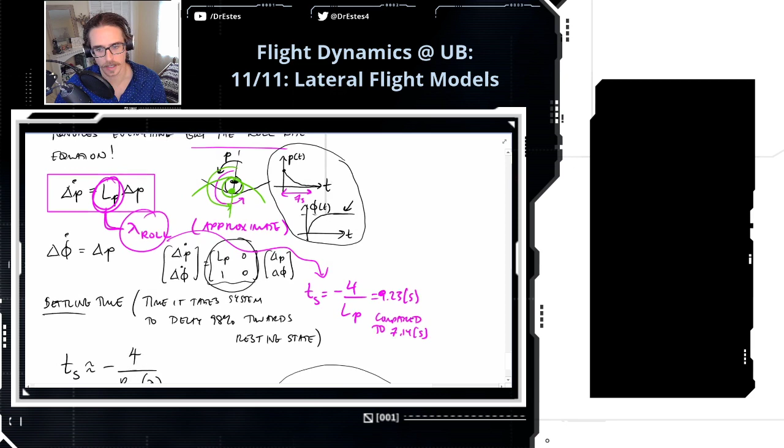Okay, so guys, that is what I wanted to do today. I wanted to say there's 3 lateral flight modes: there's Dutch roll, there's spiral, and just vanilla roll, the regular roll. And we have 3 models, and some of them are better than others. The reason we have these models is reduced order models are better for control system design, it makes it a little simpler. But it comes at the cost of the models losing some fidelity, as we showed here. At least for the 747, there are significant errors incurred by using this Nelson approximation. Like I said, these are not the only approximate models, but they still are pretty popular, and I think we'll be working with these for making some controllers for the rest of the course. So that's why I'm showing them to you.

I'm going to turn back on a little bit of these tunes.

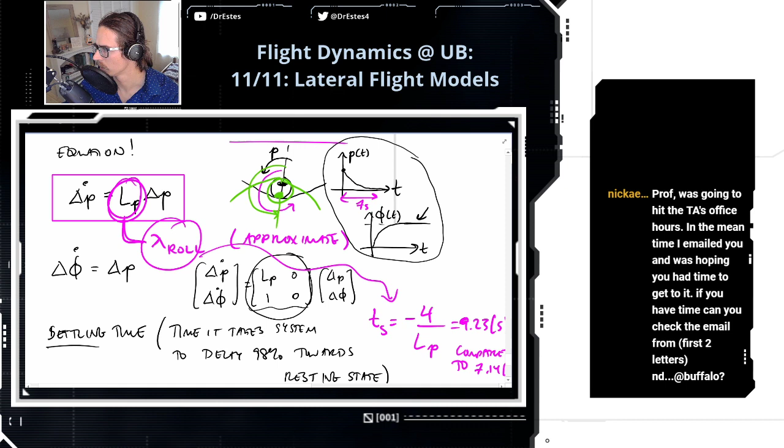Oh, okay, gotcha. Let's look. So, while performing the first question on the homework, I got through the first 3 parts. When part 4 comes up, I'm confident we have to build the whole state model, in which I have the A and B matrices, but finding the state and input vector is confusing me because they're composed of perturbation variables. I see that we are told that W star and theta star, those nominal values, are 0 in part 3, but I feel as though I'm missing something else in order to calculate these. I know the general equation would be delta U is U minus U star, but I'm not sure what I would use for U.

Okay, let's take a peek. So part 4. Wait, are you talking about... hold on, I'll check this real quick. First 3 parts, are you talking about part D on that question?

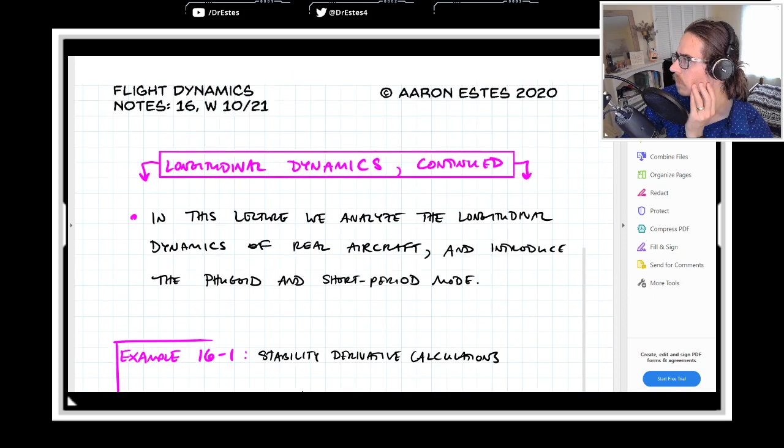How Amia Senor says, we're given the Mach number and speed of sound to find U star. That's true. Let's go back here. Now, oh yeah, build A and B, that's right. So if I pull up, where's our longitudinal? Good gravy, I need to find this thing.

I got the one for you, but like calculating delta W, confused on the general process. Okay. Longitudinal.

Wait, so are you talking about, if you're just getting the A and B matrices, these parts themselves are not based on the perturbation variables. Calculating delta W, calculating delta W. Oh, the X vector attached to A, I see. Okay, for none of these parts do you have to actually calculate that vector. So this vector is always just delta U, delta W, delta Q, delta theta. These are just the names of those variables. So if you're thinking that you need to assign a number here, the same way you would assign a number in your A matrix, that's not what you do.

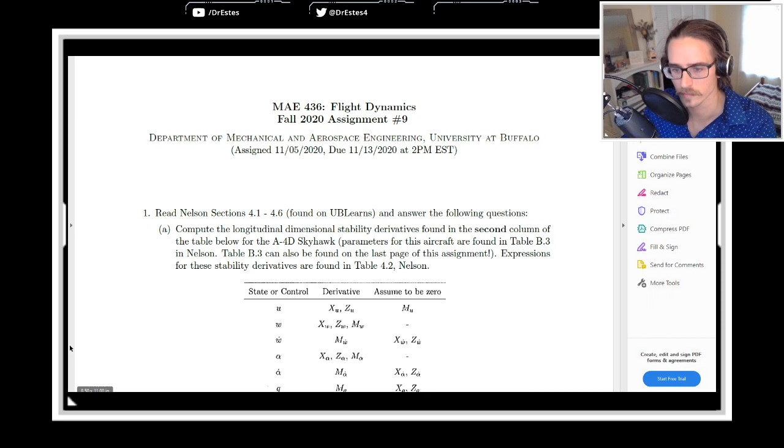Hey guys, we are halfway through the week. Wednesday. Then we have next week. But the week after that is Thanksgiving, and it is a time to get some recuperation, hopefully. That is my hope for you.

On question 2, how is the angle of attack related since it is not explicitly in the equations? The aerodynamic force and moment generated on the airframe for an angle of attack.

Aerodynamic force. Okay, what this question is talking about, it is connected to this model, but this is asking about a subset of the model. It's just asking about the moment or the force.

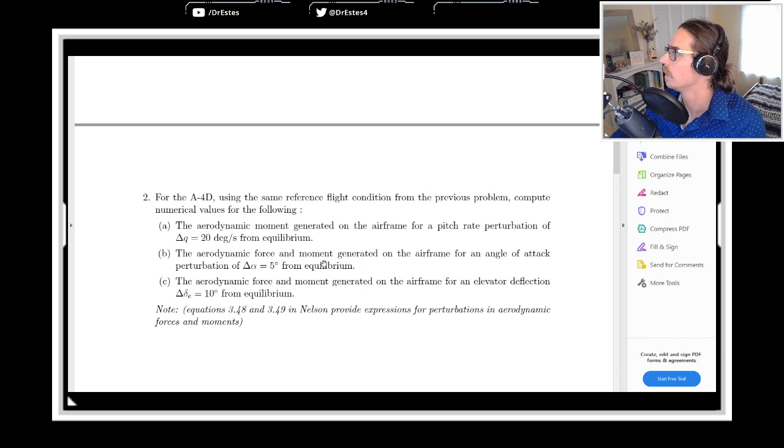So where is that? If you go to Nelson chapter 3, these two equations are expressions for the aerodynamic forces, that's X, Y, and Z, and aerodynamic moments, L, M, and N. So that question 2 is talking about: if I introduce a perturbation in whatever it's asking about, how is that going to then affect these moments?

Now, it's related to the flight condition that we give, because these stability derivatives are different depending on how fast you're going, your altitude, etc. So that's why the reference flight condition is important.

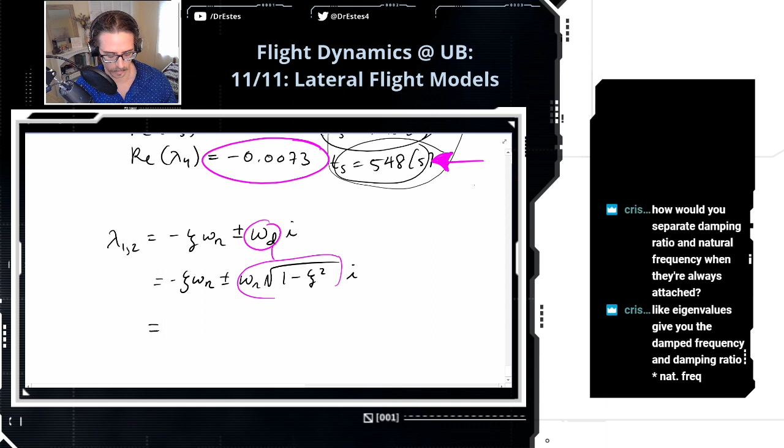For example, let's say these are your roots, just as an example. This would give you two equations and two unknowns. The first equation would be: these real parts are equal to each other. Okay, so I have that. And then a second equation, which is omega n times the square root of 1 minus zeta squared would equal 3. So you can solve these equations together, like do a substitution. That's one way to do it.

But there's other ways. These roots - this is the way I like to do it. If you draw them in the complex plane, you have imaginary and real axes. Say my root is here. The real part is the magnitude, zeta omega n. And then the imaginary part is omega n times the square root of 1 minus zeta squared.

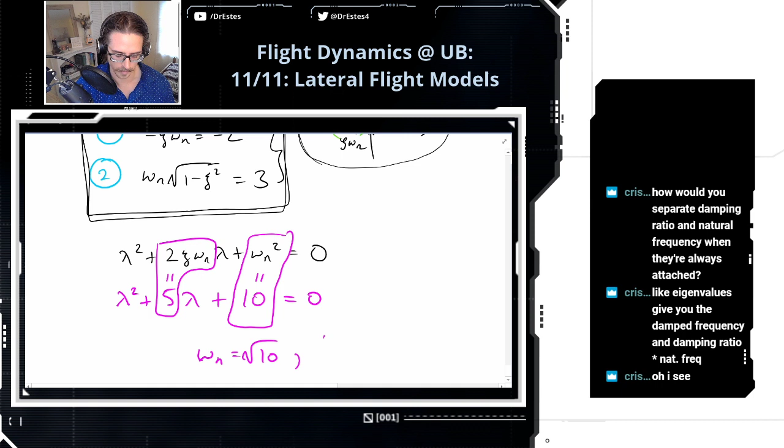Oh, another way: from the characteristic equation, the standard second order form is this. So if your characteristic equation is lambda squared plus - I'm just going to make up some numbers - this gives you a different system of equations. I have omega n squared equal to 10, and 2 zeta omega n equal to 5. Actually this is easier, because then omega n is the square root of 10, and zeta is 5 divided by 2 omega n, which is 5 over 2 square root of 10. That one's also easy peasy. Three different ways.